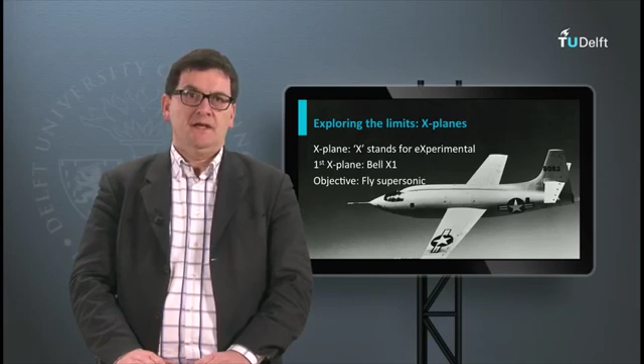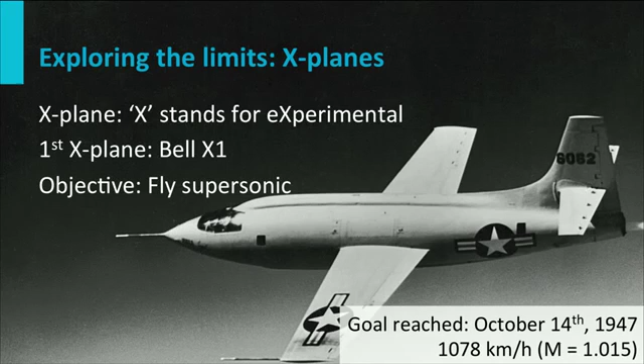as a barrier. Pilots who flew at speeds close to the speed of sound experienced intense vibrations and high drag forces. Just after the Second World War, the US was interested in analyzing this barrier and made this aircraft. On October the 14th, 1947, this aircraft flew faster than the speed of sound for the first time. This proved that the speed of sound was not a real barrier.

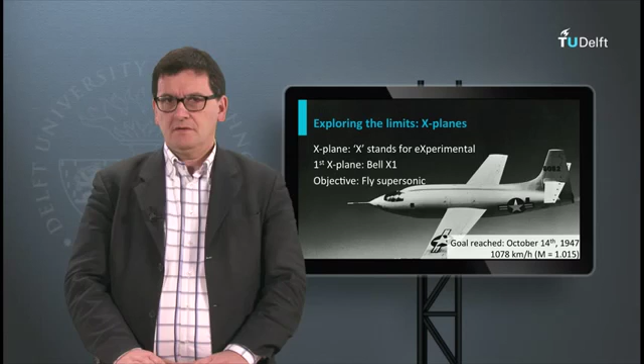In the slide you see that the speed of sound is also indicated with the Mach number. When this number is larger than 1, the airspeed is higher than the speed of sound. In the decades after the Second World War, many X-planes have been made. Most aircraft had a specific and dedicated purpose. Like the Bell X-1, some aircraft were made to explore super or even hypersonic flight.

Other X-planes were designed for re-entry into the atmosphere, to have no vertical or horizontal tail surfaces, or to have thrust vectoring, etc. The latest X-plane is the X-56, which is an unmanned aerial vehicle to explore high altitude and long endurance flight. For an overview of all X-planes, I recommend you to look at the internet.

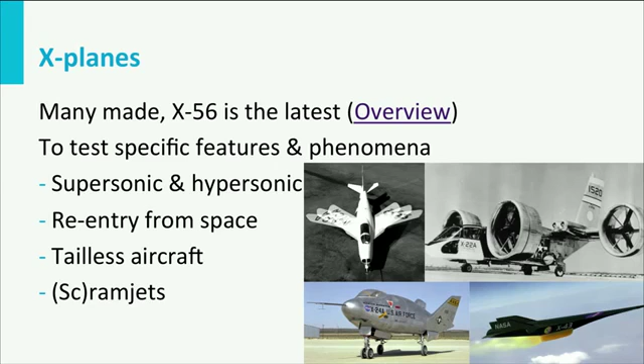Usually the number of aircraft built for X-planes is limited. Sometimes only one, sometimes a few. Also, the number of flights per aircraft was limited and often there were high risks involved, which meant that over the years a number of pilots have been killed during testing. I would like to introduce you to a few X-planes just to have a taste for you.

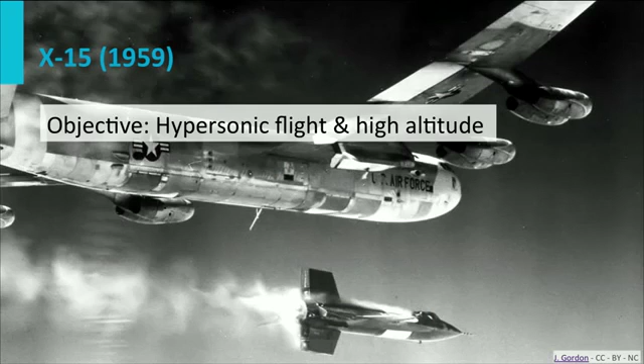This is the X-15. As you can see, this aircraft flew for the first time in 1959. Its main objectives were to fly at high altitudes at a very high speed. It is the fastest aircraft ever. It flew at a speed of more than 7,000 kilometers per hour, or at a Mach number higher than 6.5. This aircraft also had the altitude record for a long time, at an altitude of almost 108 kilometers.

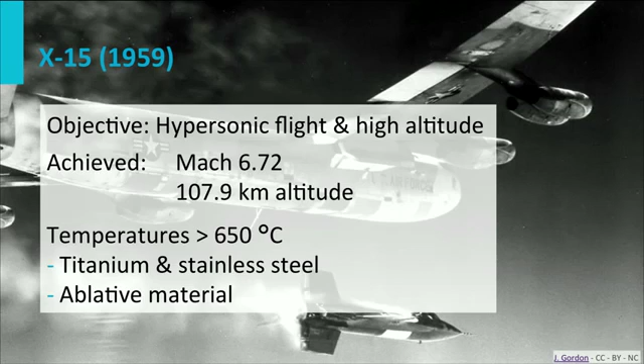During the high speed, the aircraft was propelled by a rocket engine, and the skin temperature got very high, more than 650 degrees Celsius. Therefore, most of the aircraft was made of titanium and steel alloys. For cooling of the hottest sections of the skin, ablative materials were applied. Ablative materials evaporate and consume large quantities of energy.

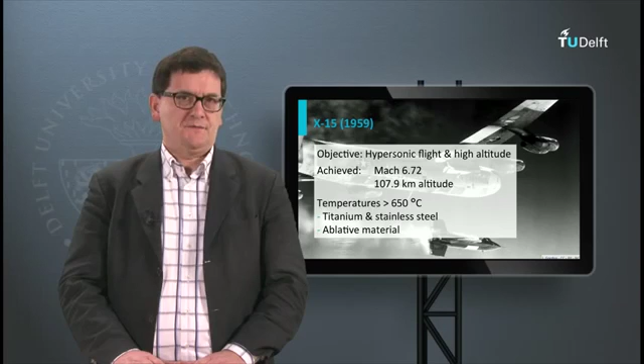Another X-plane was the X-29. This aircraft had a forward swept wing. As you know, most airplanes have a rearward swept wing with a positive sweep angle. For metal alloys, this is the only option. Main reason is that for a metal wing, only a rearward swept wing results in a stable wing. A stable wing means that by increasing the angle of attack, the wing remains controllable.

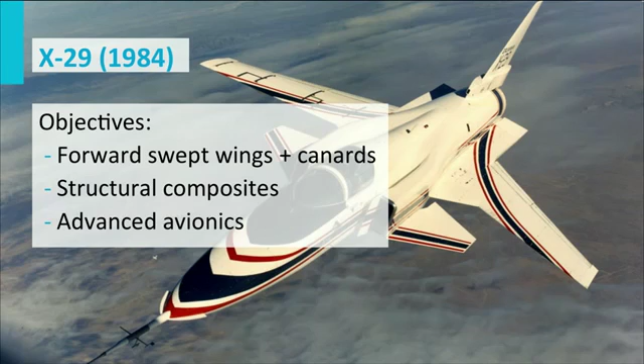For composites, however, also a forward swept wing is possible. That's because composite properties can be tailored, which means the properties can be designed such that the stiffness and strength can be highly anisotropic.

Let's return to the speed of sound. As mentioned before, we use the Mach number to indicate whether an aircraft flies slower or faster than the speed of sound. The Mach number is defined as the ratio of the airspeed v and the speed of sound a. Note that the speed of sound is not a constant, but depends on temperature.

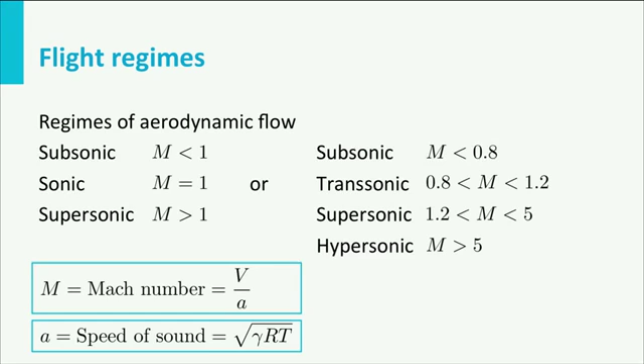See the formula. When we look at airspeeds, we can define three flight regimes: subsonic, sonic, and supersonic. Subsonic indicates an airspeed below the speed of sound. Sonic speed equals the speed of sound, and supersonic speeds are larger than the speed of sound. Another way to define flight regimes is on the right-hand side, when we name subsonic, transonic, supersonic, and hypersonic.

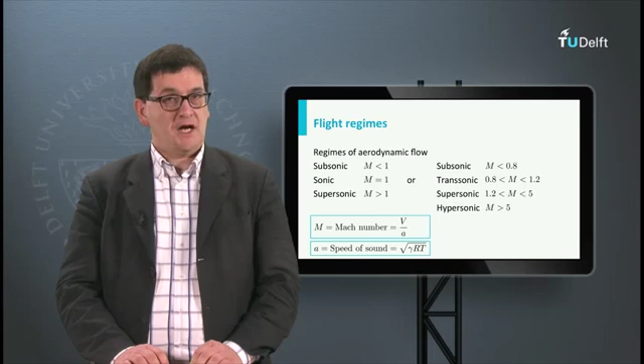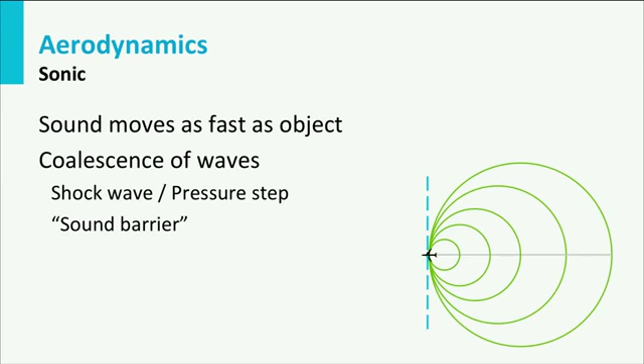The coalescence of sound pulses and pressure waves happens at the speed of sound. Here the airspeed is equal to the speed of sound. This coalescence causes a pressure front or shock wave, which is a pressure step in the surrounding air. The pressure step also causes significantly higher drag on the aircraft.

When an aircraft flying at this speed passes us, we notice this pressure step in our ears. It is recorded as a loud bang. When we hear that, the aircraft is flying at the speed of sound or faster.

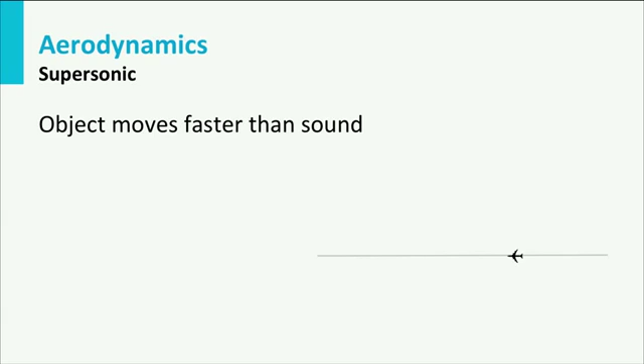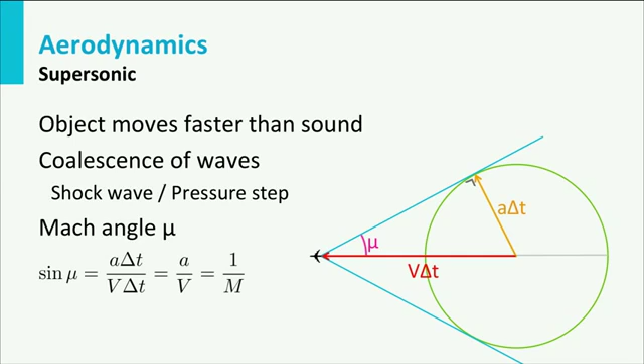In this sketch, you see an aircraft that flies supersonic, faster than the speed of sound. Again, a pressure step is generated and shock waves occur. But in this case, the shock waves have an angle with the speed of the aircraft. This is called the Mach angle, symbol mu. The sine of this angle is equal to the inverse of the Mach number.

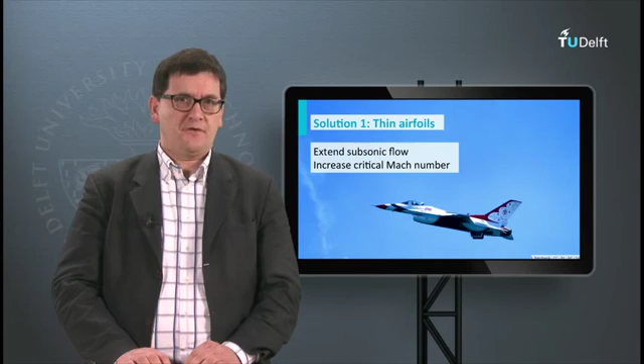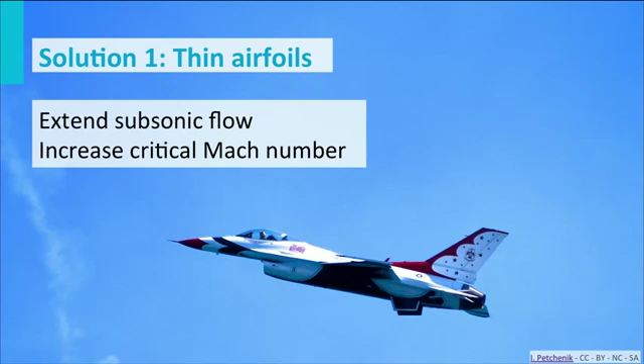One of the applied options to overcome or reduce the effects of shock waves is the use of thin airfoils. Subsonic aircraft have thick airfoils with a round leading edge and a sharp trailing edge. The thickness of such an airfoil is about 10 to 15% of the chord length. For supersonic flight, we use much smaller thicknesses, about 3 to 5% of the chord length. And both the leading edge and the trailing edge of the wing are sharp. This reduces the effect of shock waves and makes it possible to fly supersonic without too high drag forces.

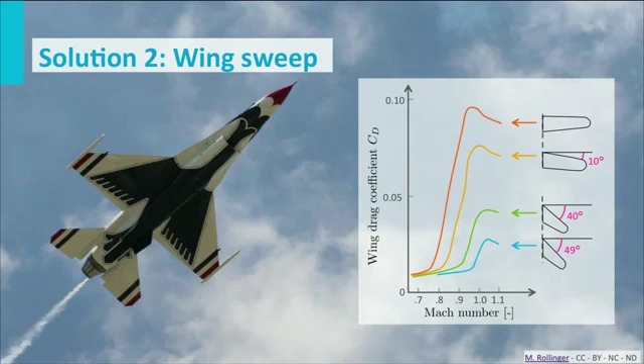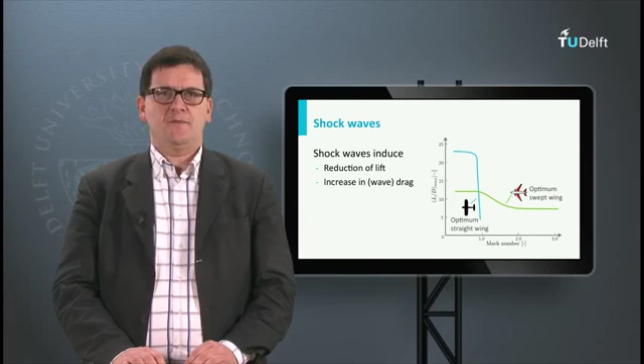Therefore, all fighter aircraft and supersonic aircraft like the Concorde and this F-16 have high sweep angles at the leading edge, but a straight trailing edge. Such wings are derivatives of a delta wing concept. So to improve the flight performance at supersonic speeds, we need to make thin airfoils and apply a high sweep angle at the leading edge. Sometimes the wings can be changed during flight, aircraft with so-called swing wings.

Summarizing, since aircraft use jet engines, the airspeed has become very high. Most civil subsonic aircraft fly at speeds close to the speed of sound, with a Mach number of about 0.8. Military fighter aircraft fly at supersonic speeds, airspeeds well beyond the speed of sound, with a Mach number higher than 1.

Flying at supersonic speeds induces high temperatures, requiring special materials. Supersonic flight also results in shock waves, which increase the drag forces. Therefore, we need to adapt the wing geometry. For supersonic flight, we use thin wings with sharp leading and trailing edges and a high sweep angle.

In the next lecture, we will go one step further. We will go to hypersonic flight.